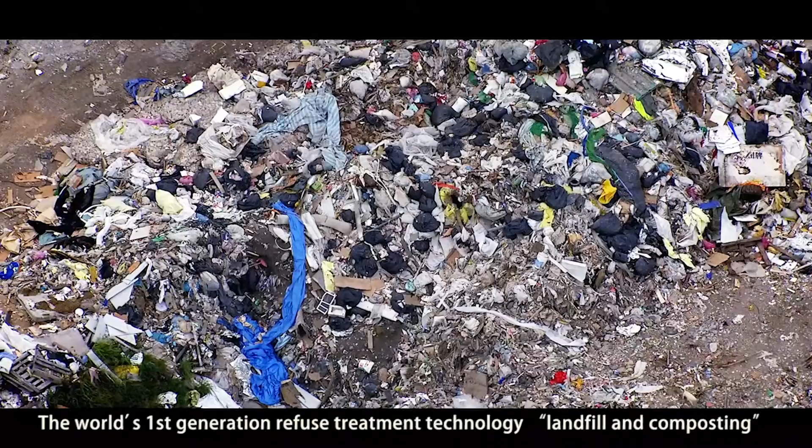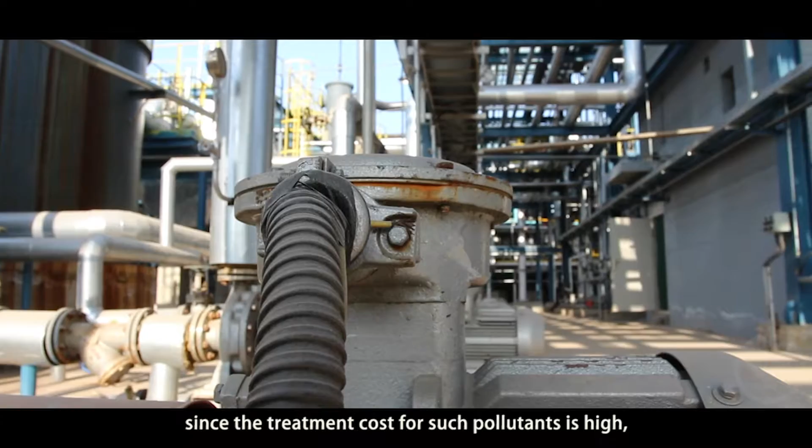The world's first-generation refuse treatment technology, landfill and composting, has been unable to meet the current situation. The second-generation technology, incineration for power generation, could lead to second contamination due to the generation of dioxin and heavy metal-bearing flying ashes.

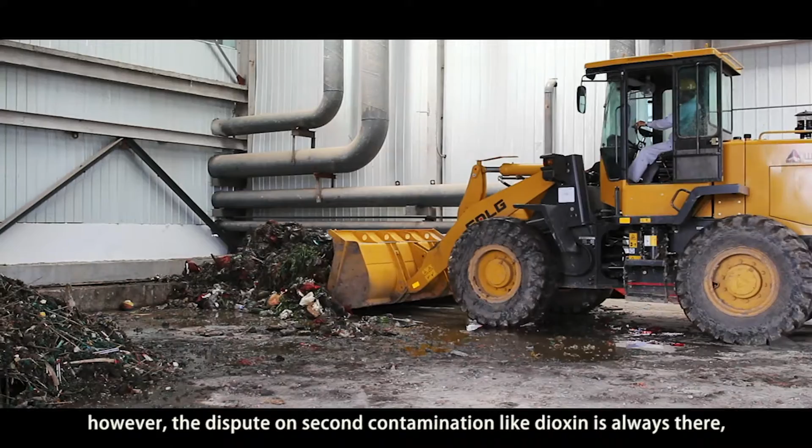Since the treatment cost for such pollutants is high, only some developed countries that follow strict garbage classification use this technology. In recent years, the refuse incineration for power generation technology develops quickly in some big cities of China. However, the dispute on second contamination, like dioxin, is always there, and anti-incineration incidents occur frequently from place to place.

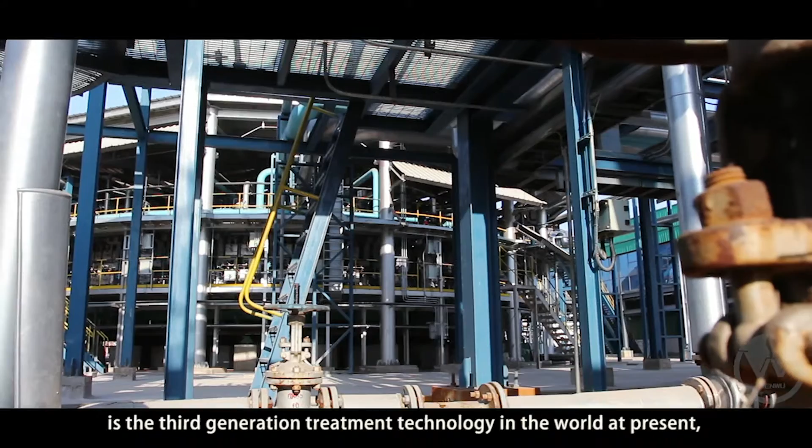Waste pyrolysis is the third-generation treatment technology in the world at present, which is actively developed around the globe and is more clean and efficient than incineration. However, a breakthrough on large-scale industrialization is not yet achieved.

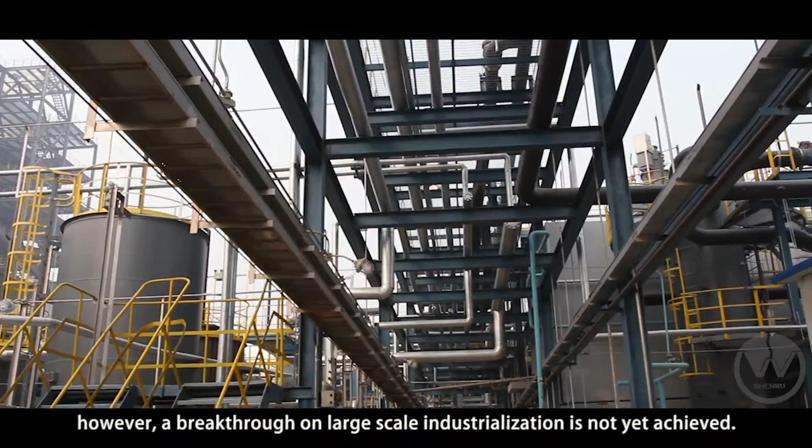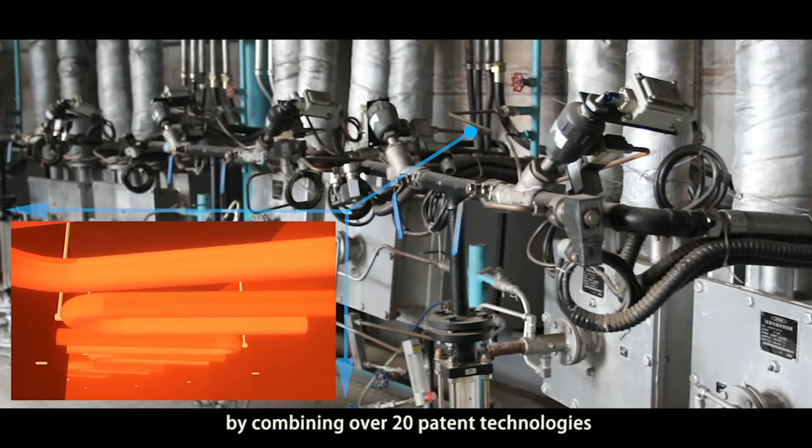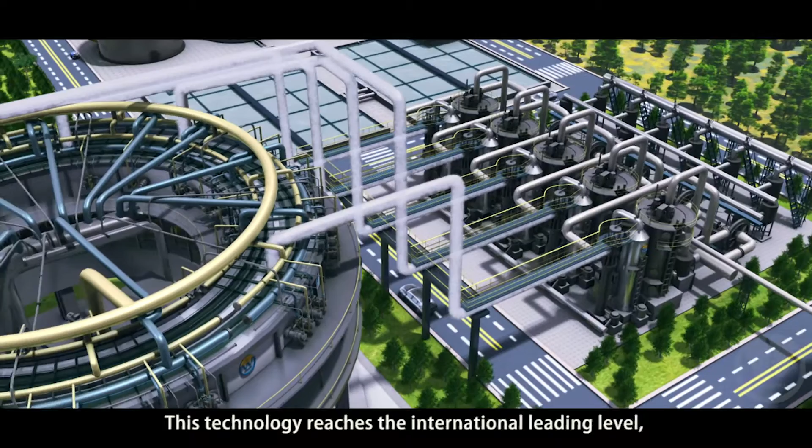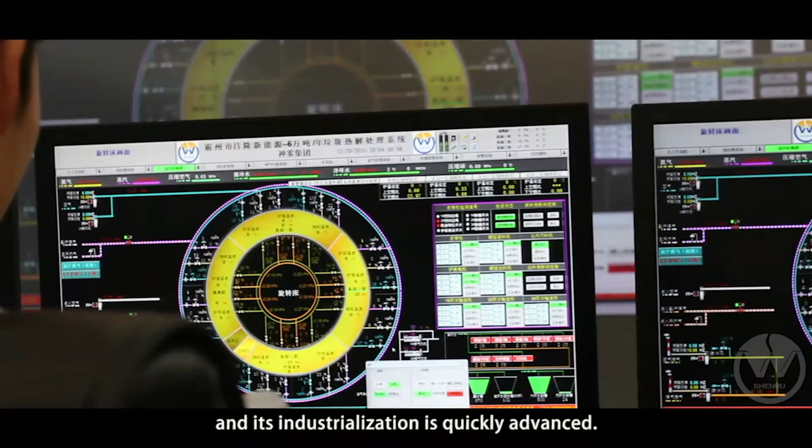Beijing Shenwu successfully develops the regenerative rotary bed waste pyrolysizing process by combining over 20 patent technologies with its own intellectual property, such as the regenerative radiant tube burner, rotary bed reactor, etc. This technology reaches the international leading level and solves the worldwide problem, and the commercial demonstration project is already put into operation and works well, and its industrialization is quickly advanced.

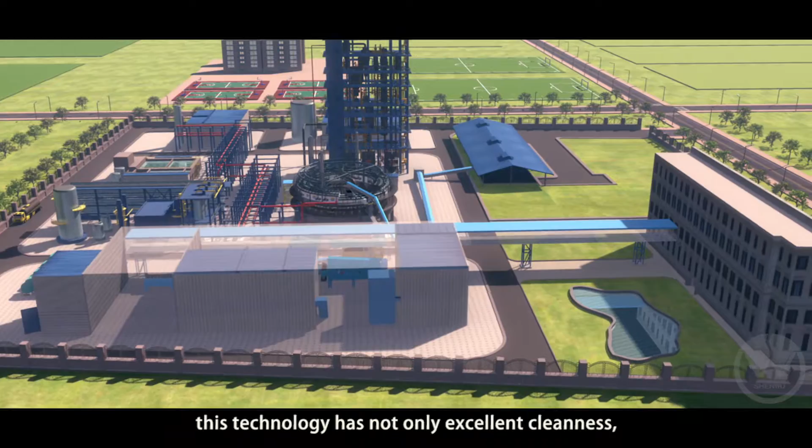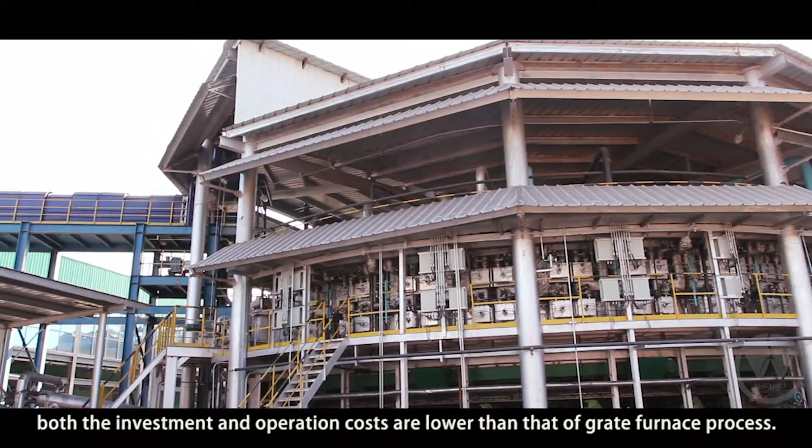By pyrolyzing the domestic waste in an anaerobic atmosphere, this technology has not only excellent cleanness, but can obtain quality clean fuel gas and oil. Since the treatment capacity of one furnace is 50 to 1,500 tons per day, both the investment and operation costs are lower than that of the grate furnace process.

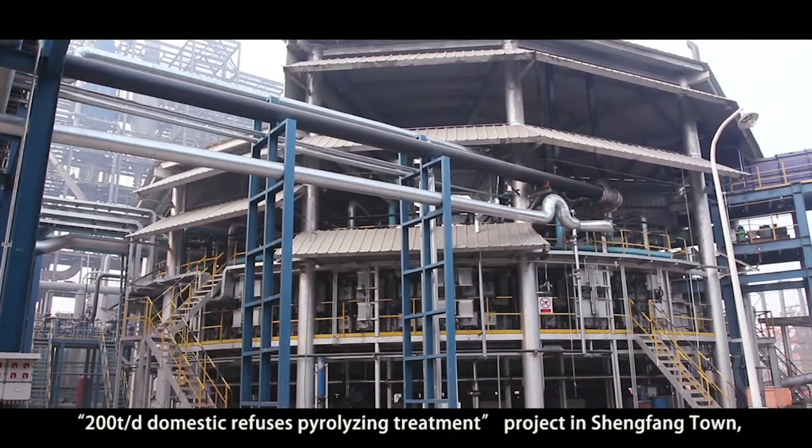This technology is supported by the SciTech Support Program of the National 12th Five-Year Plan, and the operating commercial demonstration project, the 200 tons per day domestic refuse pyrolyzing treatment project in Shengfang Town, Bazhou, Hebei Province, became the major specific subject of the integration of the Beijing-Tianjin-Hebei region, a joint development of the Beijing Municipal Science and Technology Commission.

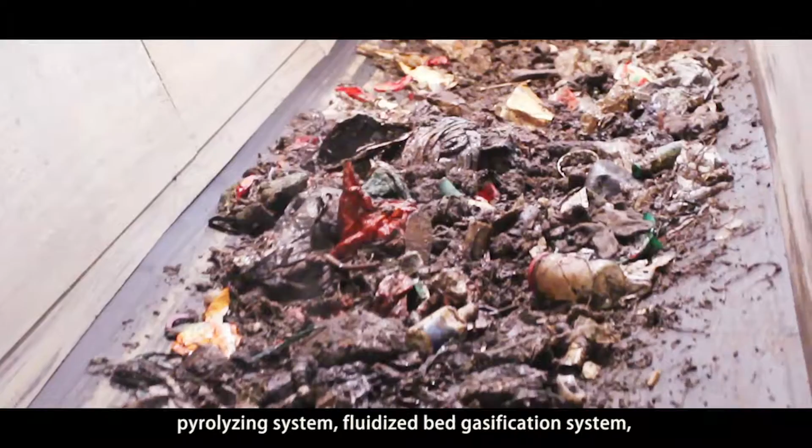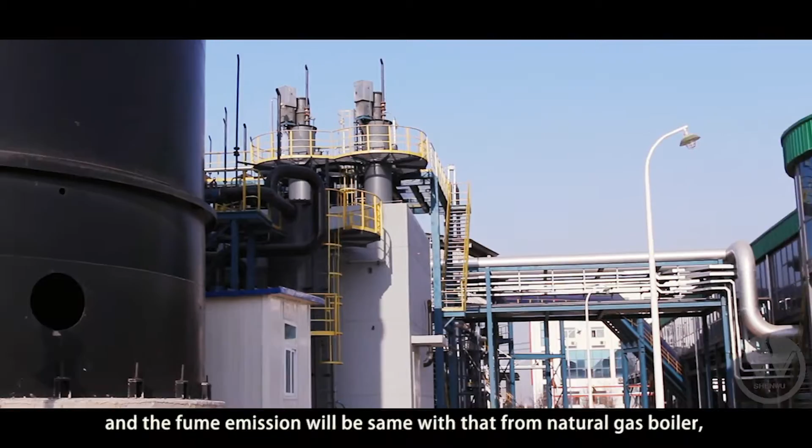The process system of this project includes the waste pre-treatment system, pyrolyzing system, fluidized bed gasification system, oil and gas separating and purifying system, etc. This project burns no waste, but changes it into clean fuel gas and fuel oil with anaerobic pyrolysis, and no second pollutants, like dioxin and flying ash, will be emitted during the whole treatment process. And the fume emission will be the same as that from a natural gas boiler. It really achieves refuse reduction, pollution-free treatment, and reclamation. See the following drawing for the process flow.

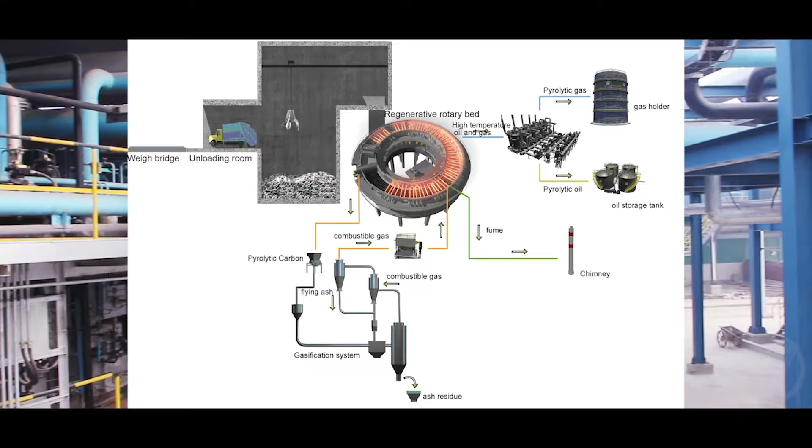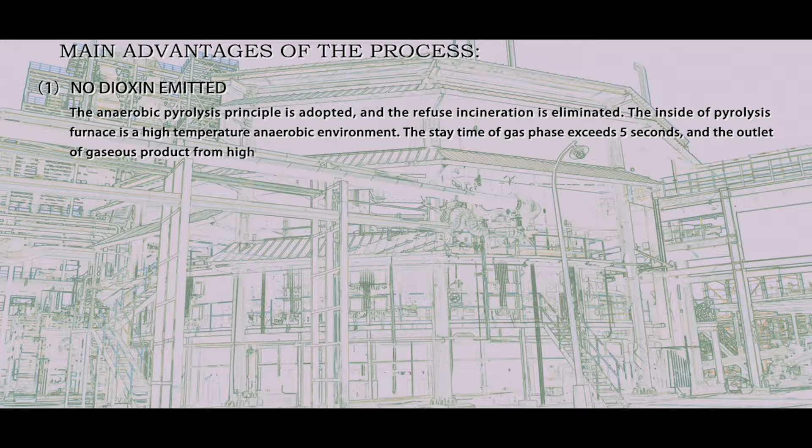Main advantages of the process. 1. No dioxin emitted. The anaerobic pyrolysis principle is adopted, and refuse incineration is eliminated. The inside of the pyrolysis furnace is a high-temperature anaerobic environment. The stay time of the gas phase exceeds 5 seconds, and the gaseous product from high-temperature pyrolysis will be quenched at the outlet. The reaction condition for the generation of dioxin is avoided during the whole process. It eliminates dioxin in principle.

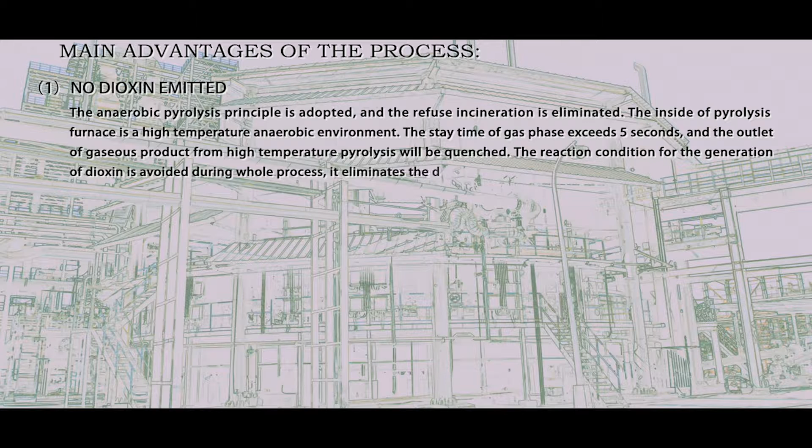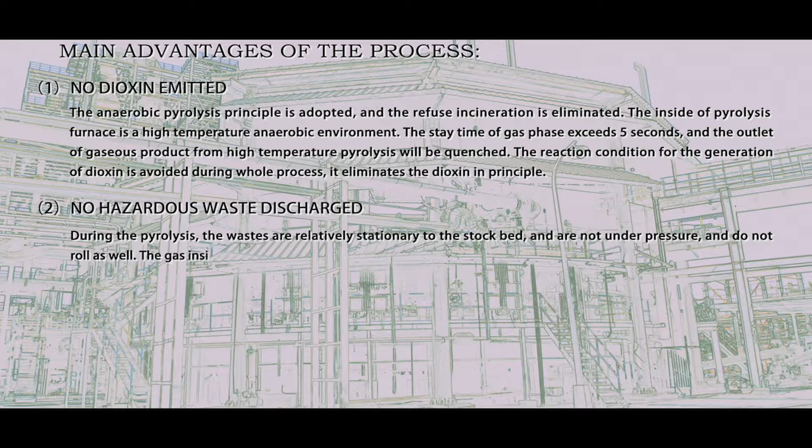2. No hazardous waste discharged. During the pyrolysis, the wastes are relatively stationary to the stock bed, are not under pressure, and do not roll as well. The gas inside the radiant tube is completely isolated from the furnace chamber, which avoids the problem that conventional incineration produces hazardous waste and flying ash.

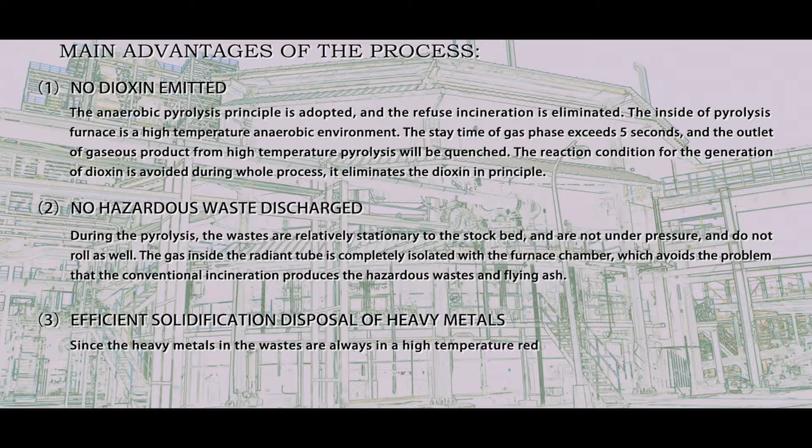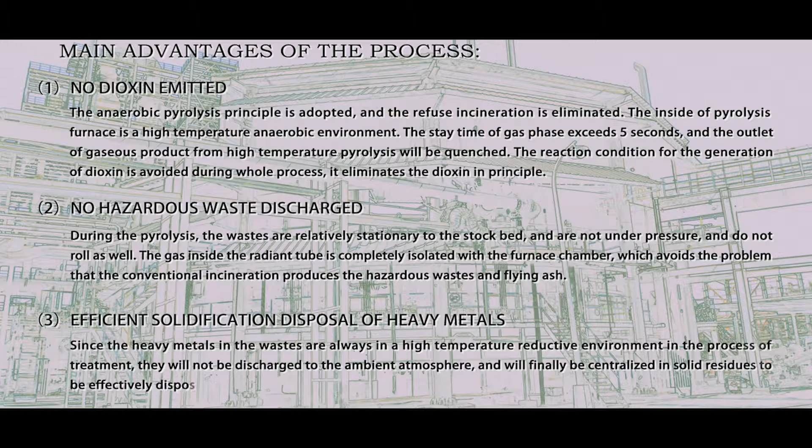3. Efficient solidification disposal of heavy metals. Since the heavy metals in the waste are always in a high-temperature reductive environment in the process of treatment, they will not be discharged to the ambient atmosphere and will finally be centralized in solid residues to be effectively disposed through solidification.

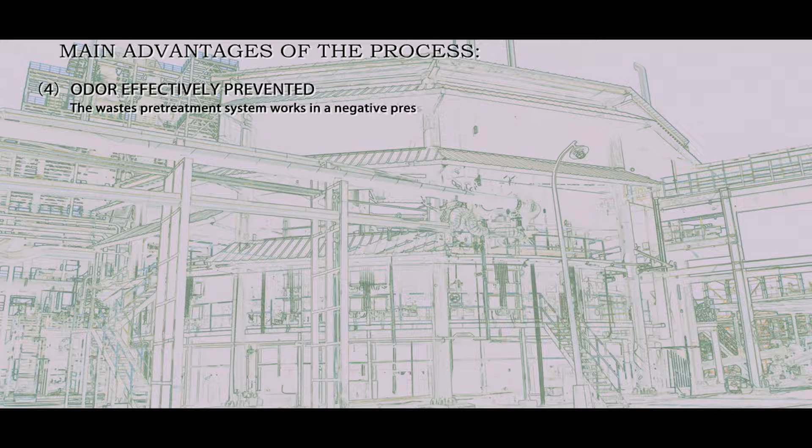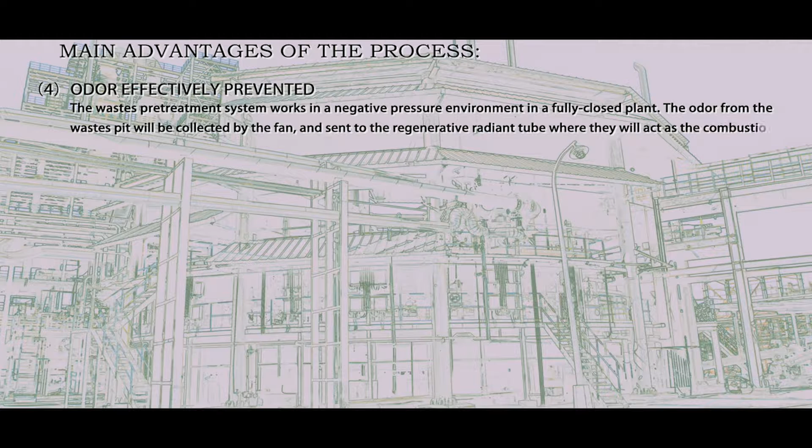4. Odor effectively prevented. The waste pretreatment system works in a negative pressure environment in a fully closed plant. The odor from the waste pit will be collected by the fan and sent to the regenerative radiant tube, where it will act as combustion air for high-temperature combustion. The odor collection device will be provided at any place that may reek of odor, and the odor will be effectively treated by the biological deodorizing system. Therefore, the reeking of waste odor is avoided.

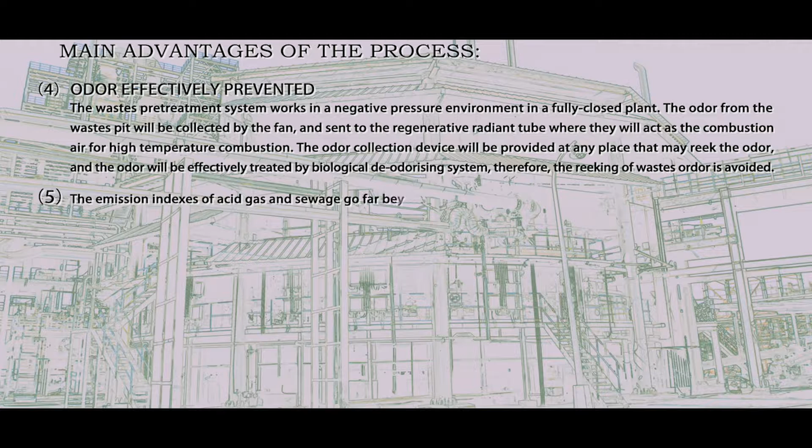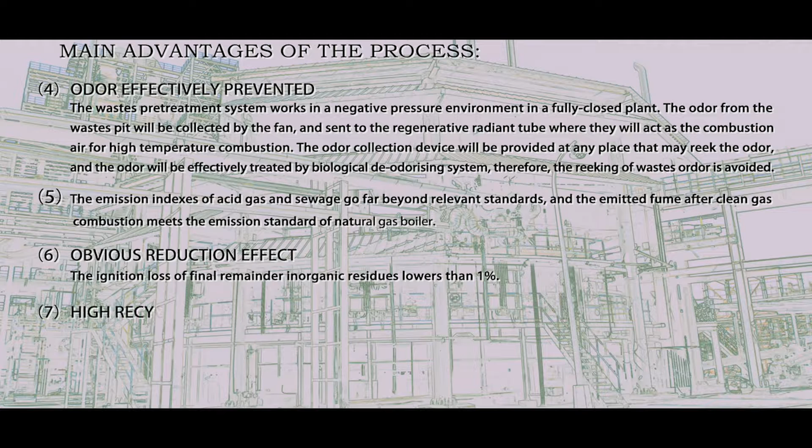5. The emission indexes of acid gas and sewage go far beyond relevant standards, and the emitted fume after clean gas combustion meets the emission standard of a natural gas boiler. 6. Obvious reduction effect. The ignition loss of the final remaining inorganic residues is lower than 1%. 7. High recycling efficiency. The commercial demonstration project can extract 9.5 million cubic meters of fuel gas and 580 tons of fuel oil. It realizes the effective resource utilization of waste. 8. Eliminating most contaminants in comparison with waste incineration.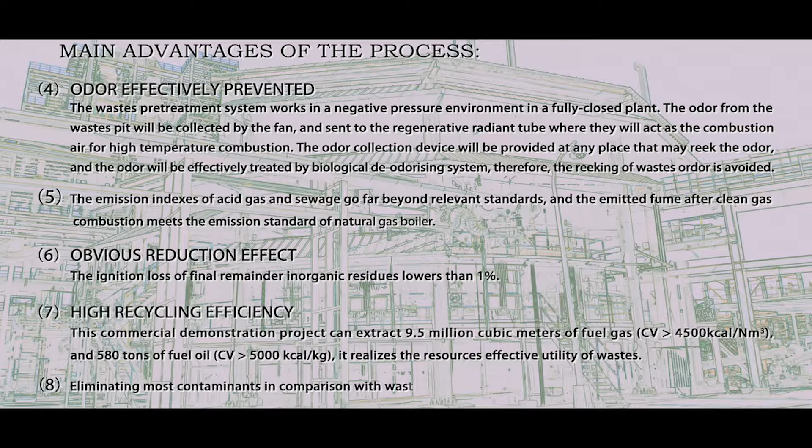This project uses the anaerobic pyrolysis method to treat domestic refuse. This process is a clean treatment process that is completely different from waste incineration. The pollutant emission does not follow the emission standard of air pollutants for waste incineration, but the more restricted emission standard of air pollutants for industrial kilns and furnaces of Hubei province, and a high chimney is not required.

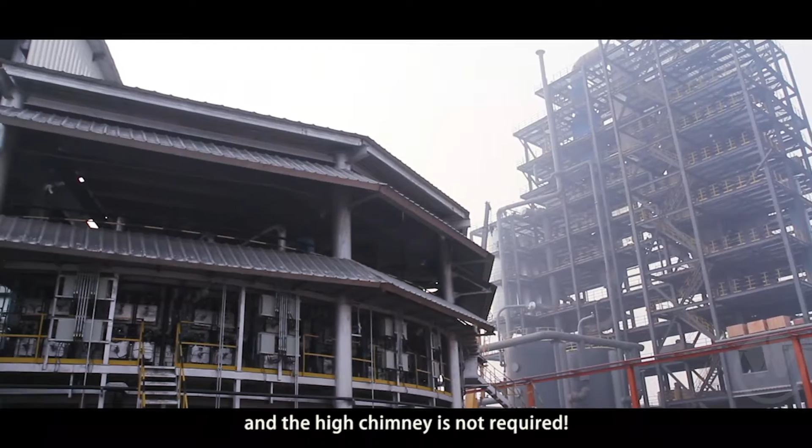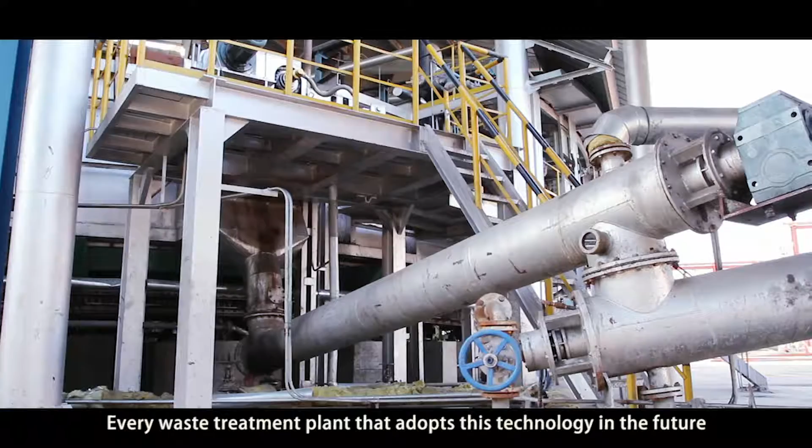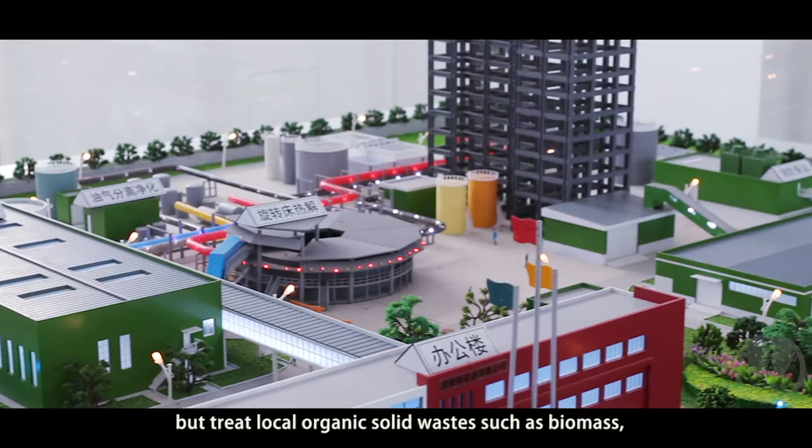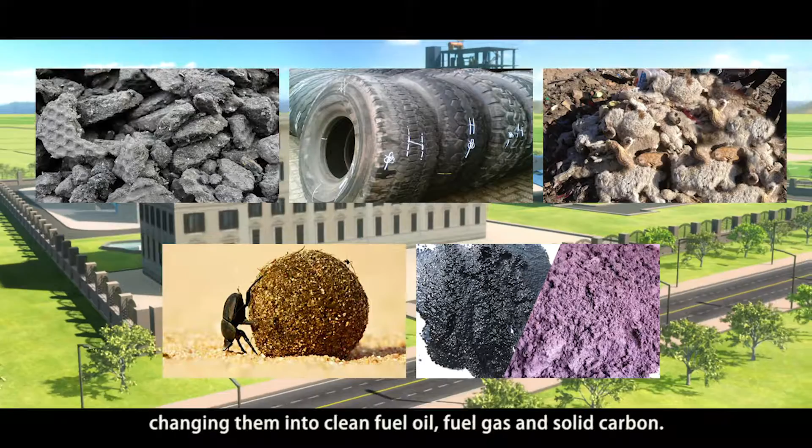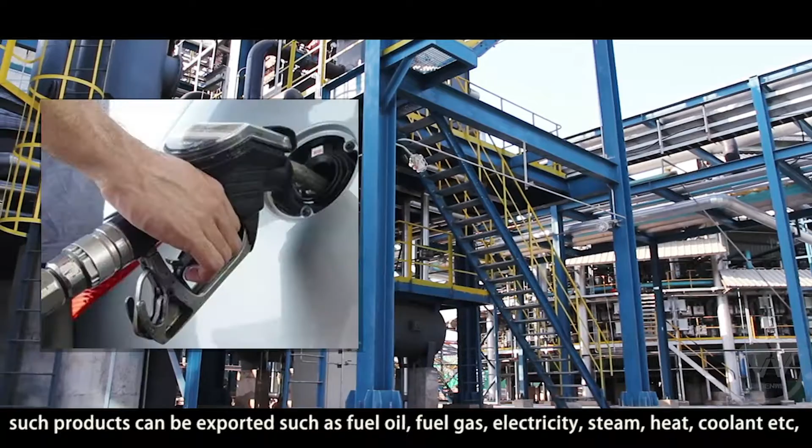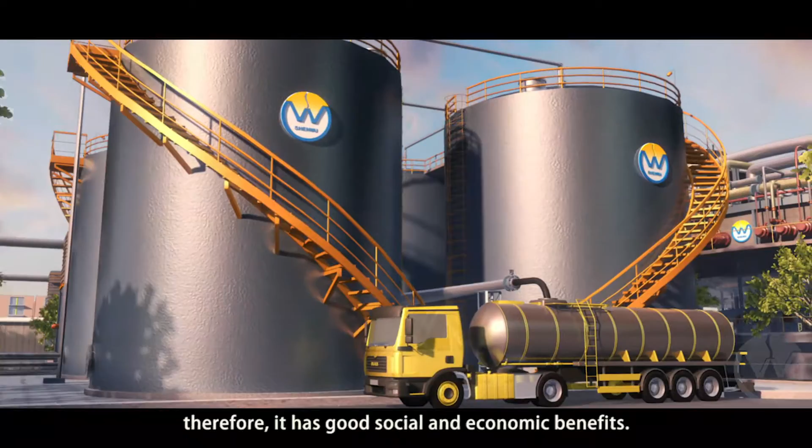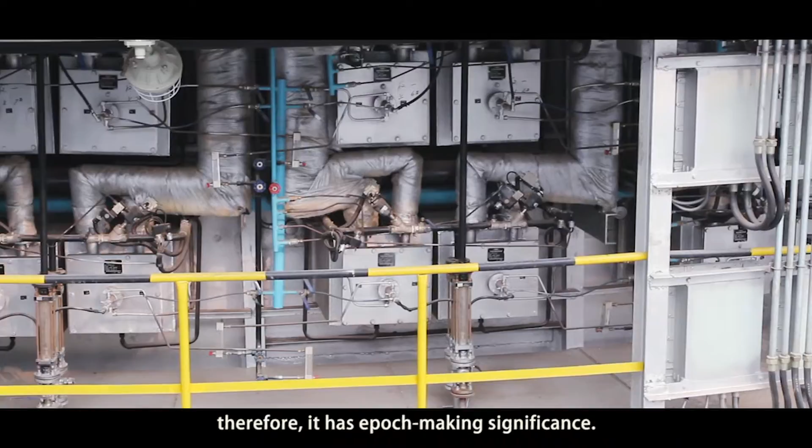According to local needs, such products can be exported, such as fuel oil, fuel gas, electricity, steam, heat, coolant, etc. Therefore, it has good social and economic benefits. The technology can completely solve the innoxious treatment problem of domestic waste, biomass, and other organic solid waste at the global scale, and can be quickly extended in the form of distributed energy due to the huge market demand. Therefore, it has epoch-making significance.